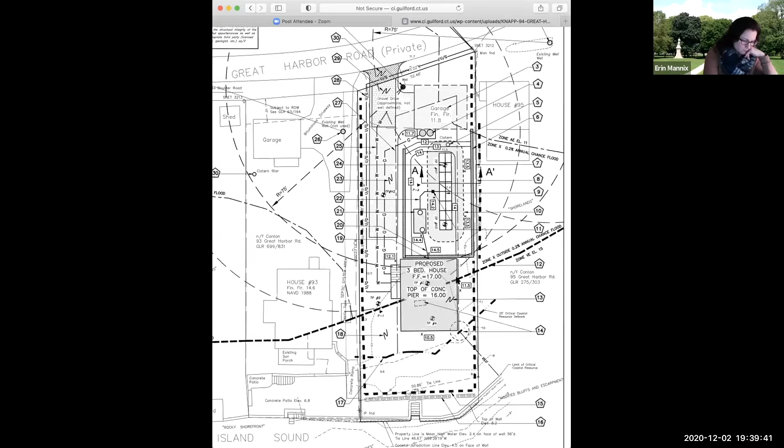As we come down the driveway, the house that's proposed is a proposed 3-bedroom house, virtually located in the same exact location as the previous house that burnt down. The square footage for this house is actually less than the original house that burnt down. And because we have a flood zone line that goes through that existing location, a VE15, we have to raise that structure to make it FEMA compliant. So that structure will be raised. That's part of the whole FEMA requirement of rebuilding within a flood zone.

The subsequent 3-bedroom house will have a brand new septic system. The septic system will be located between the garage and the proposed house. It is kind of a raised system, so we have a small wall around the outside of it, approximately 2 feet. The existing system that served the original house was basically just a cesspool. It was located approximately, I would think, 30 feet from Long Island Sound. So basically the flows for this are a lot further away from Long Island Sound, which actually works in the benefit of keeping the sound clean of any harmful bacteria coming from the septic system.

So for utilities, there's an existing well on our site located in the front of the property.

Again, we'll be utilizing that. On the side of the garage, we have placed 2 propane tanks, and that will serve as the heat source, the gas source for the furnace for the project.

And then the utilities, there's an existing telephone out in the front of the property. We'll be bringing those underground and then coming down the driveway along the adjacent property line and then tying into the house. Again, because the house is raised, it's a pier system, so it's lifted up.

I'm going to keep this presentation short, and the reason for that is you'll see in your record we have a favorable approval letter from DEP. We have a favorable approval letter from the health department.

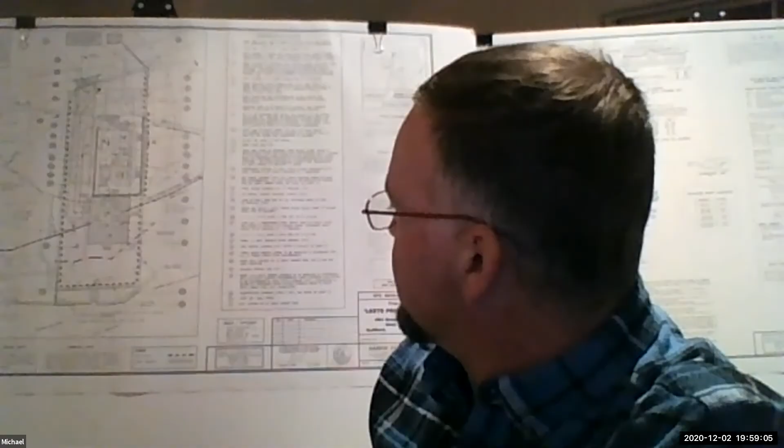Yep, if you guys give me one second, because I don't remember that comment or quote. So let me just check my plans real quick, and share that up here too, Michael.

Basically, item number 7, or call-out number 7, the exact context is, and I can read it off my plans: existing fence and appurtenances. So the fence is there to be removed and replaced as necessary in order to perform the proposed work. The reality is technically the fence shouldn't have to be removed, but I have to make that physical call-out for anybody that is doing work over there.

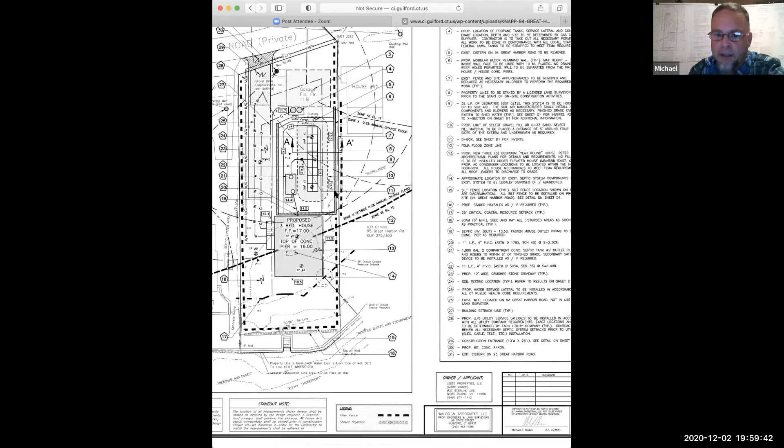Because the fence is physically on 94 Great Harbor Road, they're allowed to take it up and they want it put back. So in order to perform the work, if it's in the way at any point, they're allowed to take it down and put it back up. That's basically what we're saying.

Does that make sense, Ben? Yeah, I think we understand.

Also, I assume there'll be a dumpster for the construction. Do they have any information about where that would be put?

As of right now, that's more of a construction type of thing, and I don't think that has been thought out as of yet. Generally, it'll probably go in between the proposed garage and house, basically where the septic is, while they have construction going on. Generally, the septic system is the last thing to be put in for new construction, so that's a reasonable spot.

Or it could just be put in the driveway area. But we haven't really given that much thought because we haven't been approved yet, and we're not even in the permitting process. But again, because the lot is tight, you're not going to see this big 40-yard dumpster in there. You can't make the swing distance, so it'll be a smaller size dumpster that comes in and out.

Great, thank you. The last question is just— Can I just tack on to that very quickly? Sure. It is a modular construction, this is Mark, so there should not be a lot of construction debris from the actual building itself.

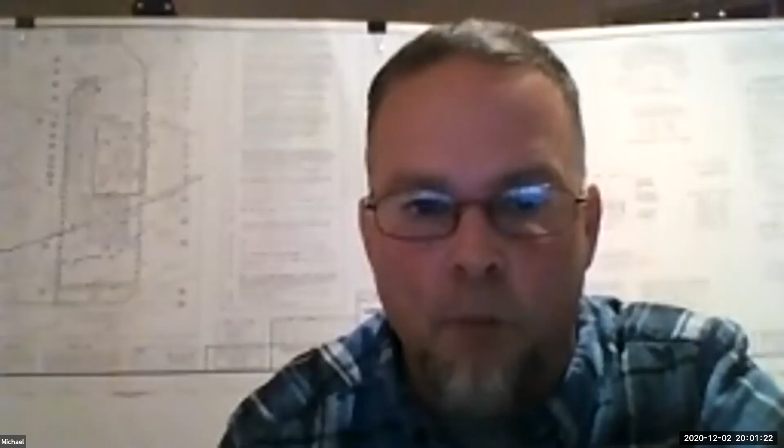Thank you. And the last question was just, in the site plan, does the back of the home have no windows? Mark can speak again to that matter because that's his house. The back, could you clarify? Sure, on the roadside, there will be 2 windows on the roadside. Okay, thank you very much.

Terrific. Is there anyone else that would like to speak in favor of or against this application? Very good.

I'll put it to the commissioners. How do you guys feel about acting on this evening? As you know, we need a supermajority in order to waive the second public hearing.

I think, as all of you know, this has been on our agenda for a long time, and in my opinion, the applicant and Mr. Harkin have gone to great lengths to address concerns from the state, from the health department, from the DEP, and I commend them for their efforts at getting this right. So I'm in favor of it.

Scott, how do you feel about it? Yep. How about you, Richard?

I was going to say exactly the same things you just said. It's been on our plate a long time. They've in good faith done due diligence and come back with a super plan.

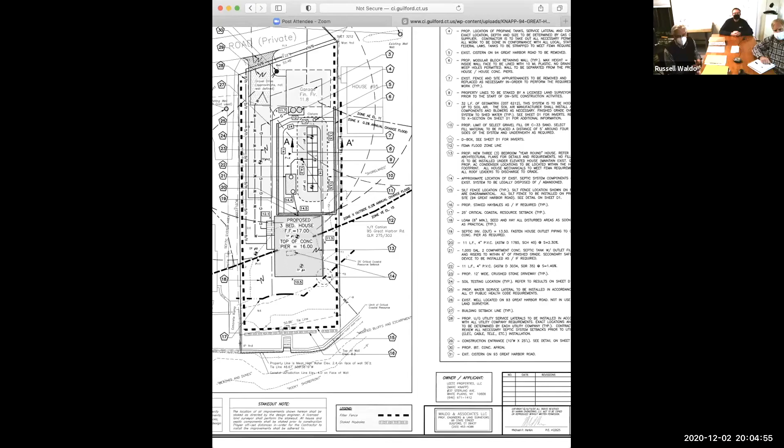I guess if Erin can put up the site plan, it would probably be a good place to start. Could you zoom out initially so you can get the layout, and then I'm happy to zoom in closer. Okay.

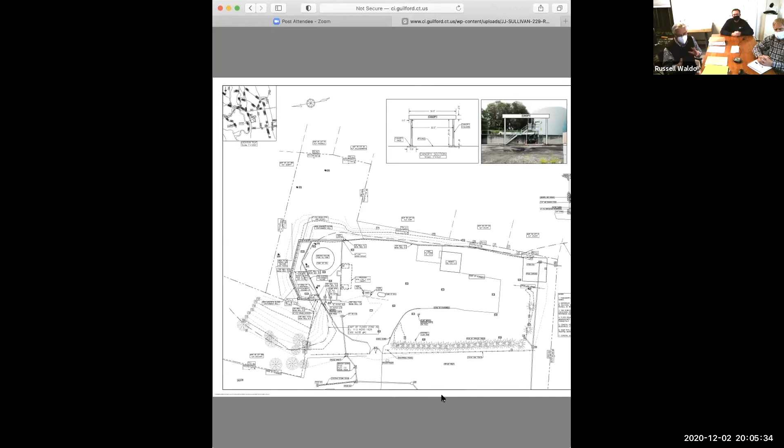Just as a little bit of background, I won't go into any great detail, but Sullivan's have been making improvements to their terminal facility over the years, focusing on both changes in the marketplace—they don't sell the same products anymore in some cases—and also upgrading their safety and environmental protocol in the terminal.

In 2018, 8 above ground fuel storage tanks with a total capacity of 84,000 gallons were removed from the yard area and disposed of. Also in 2018, the 200,000 gallon oil storage tank on the north side of the property site—now essentially the only fuel storage tank remaining in the yard—was completely inspected, and a new floor was installed in the tank as a safety improvement.

In December of 2019, just a year ago now, a CAM application and site plan were filed to complete the first phase of containment improvements for the 200,000 gallon tank. It's part of the spill prevention, control and countermeasure plan that is managed by the EPA, required for a terminal of this nature because of the amount of storage they have, particularly above ground storage.

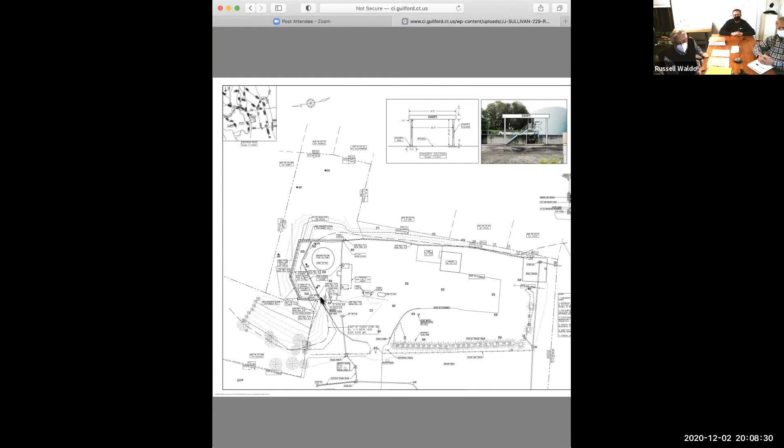In addition, an impermeable membrane covers the entire floor of the containment area around the tank. The soil in that area is fairly sandy and didn't have any impermeable coverage, and the membrane now makes that containment area completely impermeable. There were also improvements made to the plumbing leading to the delivery stanchion, and some electrical improvements at that time, which were approved after our application in December of 2019.

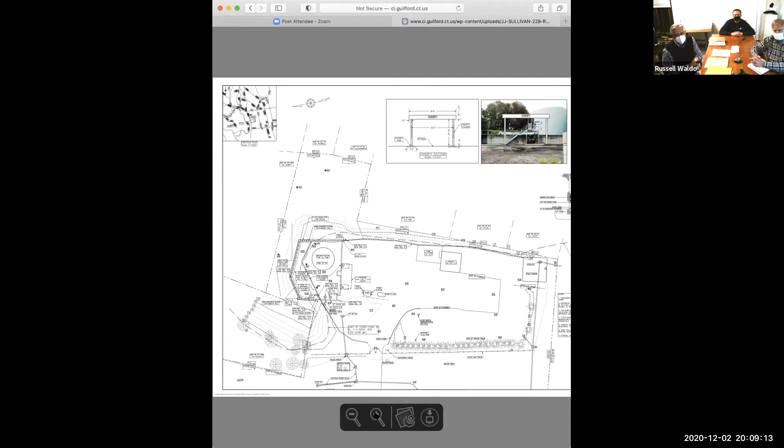That brings us to the current application, submitted on October 22nd. It's the last phase of these safety improvements, for construction of a canopy very similar to the canopies you see at every gasoline station. The canopy will cover the area where the trucks fill their tanks from the 200,000 gallon storage tank. We took a photo and overlaid the canopy to show what it looks like, shown on the site plan.

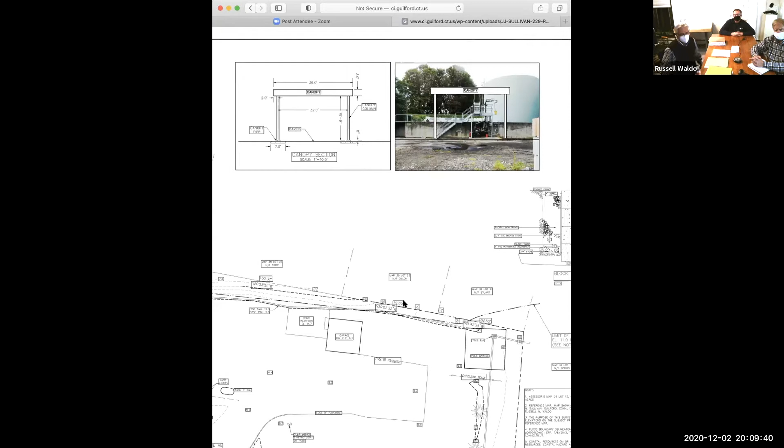The canopy, just to clarify, is 36 feet long, left to right on the photo, and it is 16 feet wide. It will cover the truck that pulls under the canopy and protect the driver and operator from any kind of foul weather that occurs.

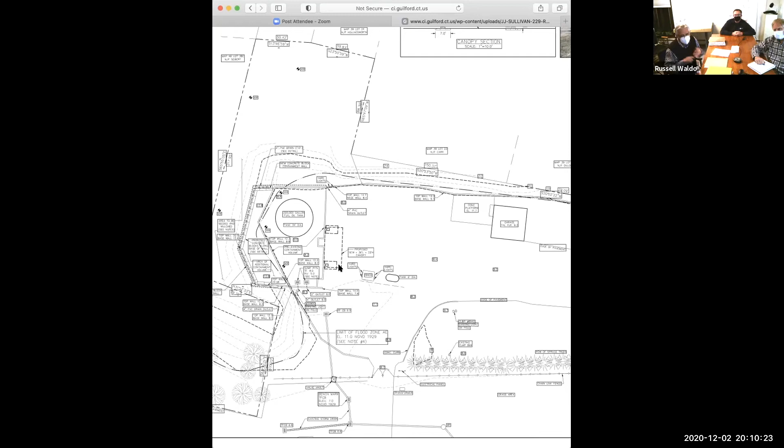It just so happens, and it's kind of intuitive, but the busiest season for J.J. Sullivan is the winter, when the weather is the harshest and there's ice issues and things like that. Currently, the filling stanchion requires drivers to climb up on top of the truck and fill most of the trucks from the top. About half of Sullivan's trucks are filled from the top, half from the bottom. But this canopy is going to really protect the drivers and be a tremendous added safety feature. It's going to be a great improvement.

That's really the basis for the application. We were going to go forward last meeting, but the DEEP didn't think they were going to get their letter in time. They got it in just before the meeting, but we did go forward and have a meeting with the Design Review Committee on the 18th of November, and we had a nice discussion. They were obviously interested in the aesthetic things the Design Review Committee is concerned about and should be. They were very supportive of the project, and they had some suggestions regarding the color of the canopy fascia, and that's part of your record. J.J. Sullivan has indicated that they will absolutely comply with the recommendations of the Design Review Committee regarding the color that the fascia of the canopy will be painted.

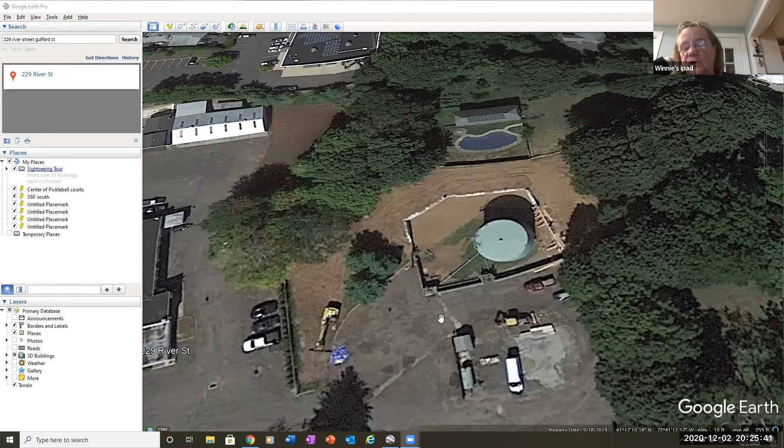I'm sensitive, but it has significantly affected our property, which is right behind it. And I bring up that I would like to see that this containment - excuse me, this new project - does not compromise our property even more.

I would note that probably the biggest concern would be lighting, and that Mr. Waldo has expressed that they would only have two downlights within the structure. So it would be much less impactful than putting in area floods. I would again note the lengths they're going to try and make this as least impactful as it can be. But I would put it back.

I wonder, could Mr. Waldo speak to the suggestion about moving the canopy and the feasibility of that? I could - can I also see the plot plan again, please?

I'd like to also remind us that our public hearing is with respect to coastal impacts, as this is not a special permit application. This is a site plan approval and a coastal application. Got it. Thank you for the clarification, Aaron.

The delivery stanchion for this facility has been in the same position for many years. There hasn't been any movement of it. All of the plumbing for the tank delivery and discharge has been located in the central location that it currently is.

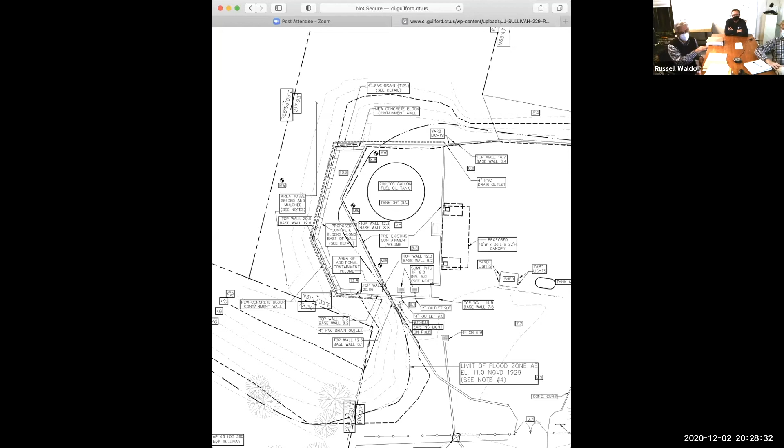Thank you. Aaron, is there anything else that we need to check with respect to the CAM and/or site plan revision?

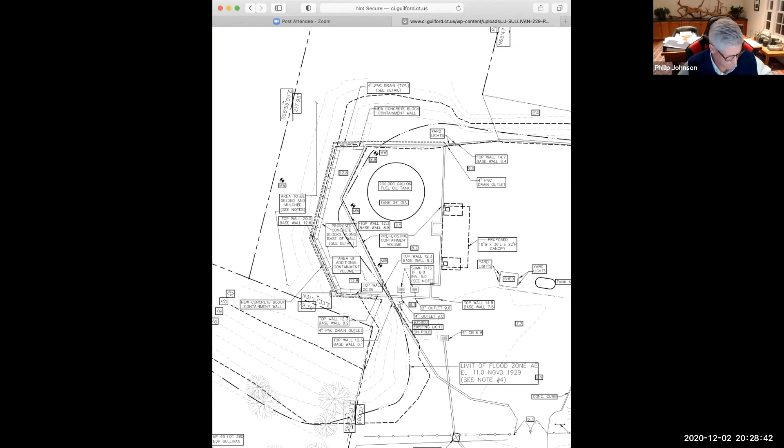I believe we have all of our letters in as far as comments. Well, we did have a question - we don't have to take comments for and against, do we, as this is a site plan? No, with respect to the site plan, right - the site plan is not subject to a public hearing. The coastal application is what the public hearing is for tonight.

Okay, so would anyone like to speak in favor or against the coastal area management aspect of this application? Okay, would someone like to make a motion to close?